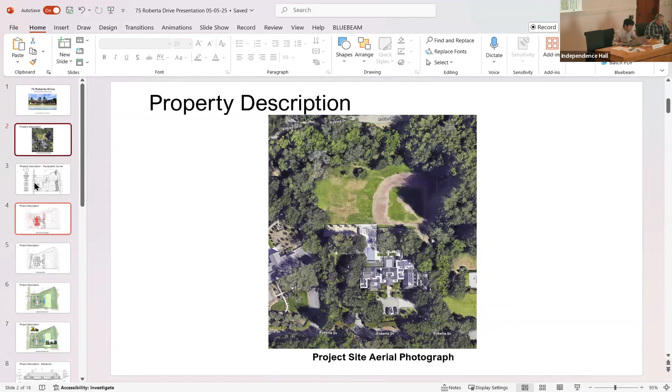To give background on the property: the size is approximately 3.049 acres and is in the rural residential RR zoning district. The overall site is relatively flat with the exception of the eastern edge, which slopes upwards towards Roberta Drive.

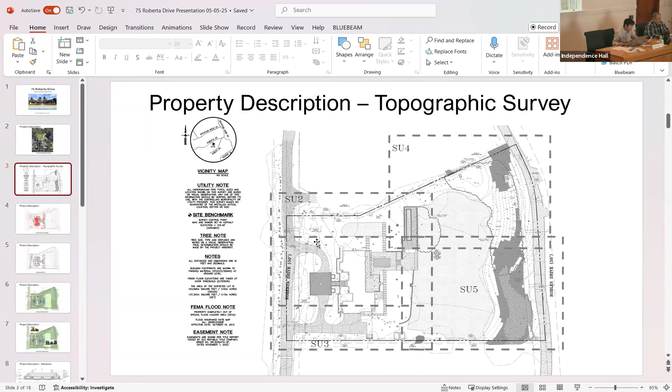The project site is visible from Roberta Drive at the front property line, as well as from Roberta Drive at the rear property line, and from adjacent properties. The site is heavily screened on all sides by existing trees and shrubs.

The applicant has also provided a demolition site plan. This is the overall site plan, which shows the details and extent of the conceptual design project.

The proposed main residence would be relatively in the same location as what is existing. The two ADUs, notated as West ADU and East ADU, are called out on the plans. The plans also show a pool in between the two ADUs as well as a generator enclosure on the rear side.

The applicant has also provided a proposed landscape plan, which shows the extent of the landscaping on the site, as well as the proposed screening.

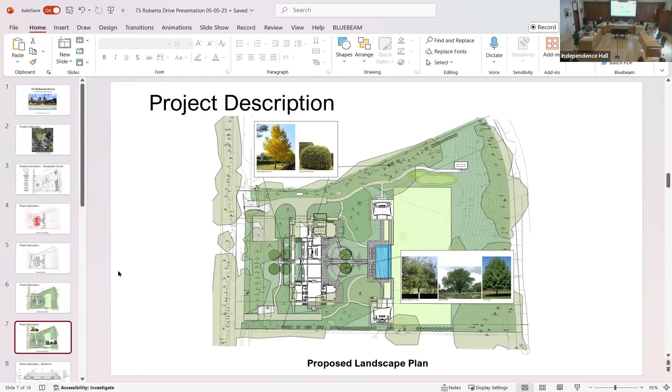So these next few slides are the elevations. For the residence, the project plans, as you can see in the elevations, call out proposed basements.

The basement grading quantities will exceed the maximum basement grading permitted for the site per Woodside Municipal Code section 151.22C, table 1. The project site shall not exceed 2,666.67 cubic yards for basement grading.

The proposed basement grading, as shown on the project plans sheet C1.0, is 4,105 cubic yards, and also does not specify the quantities of the basement light/egress wells.

The project includes large mechanical rooms and storage rooms in all proposed basements, which could be minimized to reduce the amount of basement grading. No exceptions can be permitted for the maximum permitted basement grading. Therefore, the applicant will need to reduce the size and/or depth of all proposed spaces and update the grading calculations to meet the Woodside Municipal Code requirements.

This is the elevations with the basements, starting with the front. This is the elevation for the rear. The elevations for the sides are from looking at the east, and elevations looking at the west.

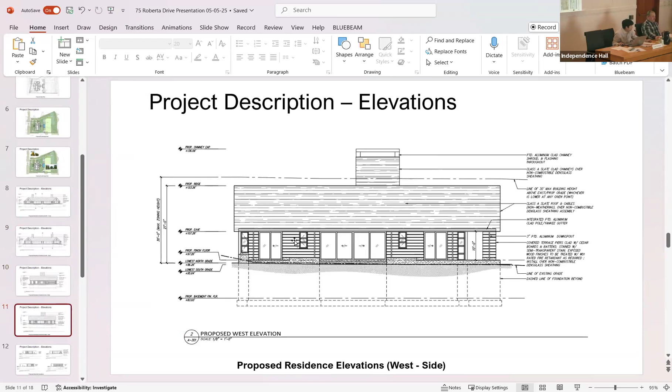The applicant has also provided elevation plans for the West ADU, as well as for the East ADU.

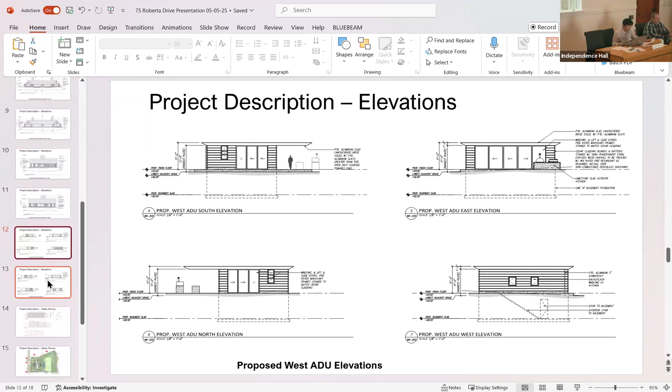There are two proposed entry gates at both driveways. The gate at the driveway on the northwestern side would be 16 feet wide and consists of compact vertical and horizontal steel framing. The entry gate for the other driveway at the southwestern side would also be 16 feet wide and is proposed with horizontal steel framing.

The wood fence is called out as a replacement for the existing fencing along the front of the property. There are also stone retaining walls proposed near the front side of the main residence and additional walls at the pool and lawn.

The applicant shall provide the fence calculations in relation to breaks and openness and ensure that the gate allows for more than 40% in open design.

The entry gates would likely need to be relocated at formal design review, as the setbacks would not comply with the adjusted setbacks taken from the interior of the easements on the project site.

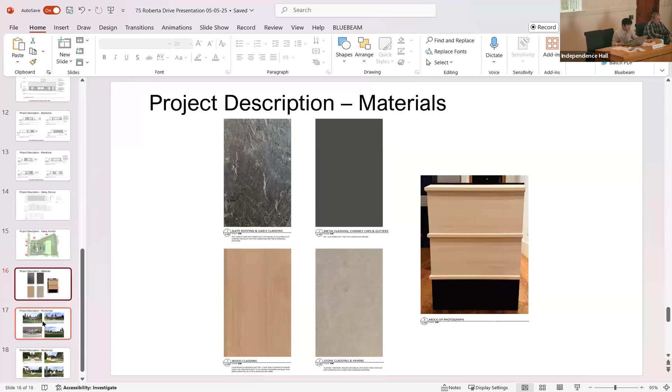This is the digital material samples for the project, including slate roofing, as well as wood cladding, stone cladding and pavers, as well as metal chimney caps and gutters. Lastly, the applicant has provided some renderings of the project site, including the main residence from various perspectives, as well as renderings of the ADUs for the west and for the east.

And so that concludes my presentation. Story poles were installed at the site at least 10 days before the hearing tonight. Staff is happy to answer any questions, and the applicants are also here in attendance. Thank you.

At this point, I'd like to ask the board if they have any questions.

One, I noticed that solar isn't part of this plan. If I'm wrong, is solar required at this point in California for construction? So at the conceptual design review, solar is not required to be shown, and it's not necessarily even shown at formal design review. There is a building code requirement for solar, and given laws related to solar in the state, they can't be reviewed or denied for aesthetic reasons. So it's only health and safety, and therefore we don't necessarily see them very often.

Just wanted to ask for the applicants - they will need, if they haven't already, they will definitely need to by the building permit stage to work out whatever's required by building code.

Other question: with regards to height, is it near a transit corridor? Is it within half a mile of a transit corridor? That's not something we've looked at. I don't think there's any buses on Mountain Home Road. No, it's within half a mile, so 84 also. If that's within half a mile, I'm not sure. We haven't looked at it.

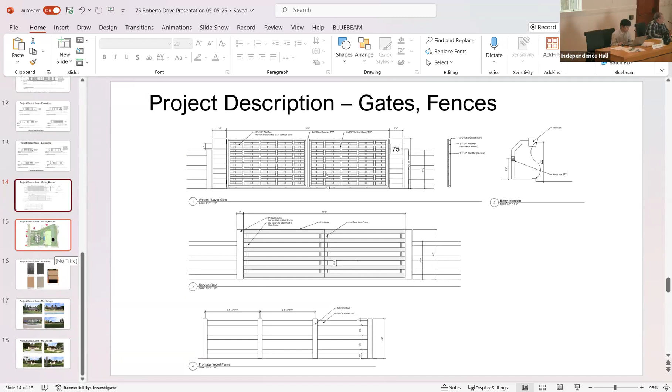We'd like a little bit of clarification on the louvered roof areas on the two ADUs. That's something we'll need more clarification on at the formal design review stage. They need to be at least 50% open to not be considered a solid roof, and they can't be closable - because if they're closed, they wouldn't be 50% open. So we'll get some more details on that with the formal design review. Sensored or not, we don't know that at this point. Rain makes them close? Yeah, they shouldn't be able to close at all, they should be in a fixed position. That's only a problem on the west, and only if there's an issue with setbacks or floor area. When you get beyond 8 feet from a building wall, a solid roof starts to count towards floor area, so that'd be one thing to look at.

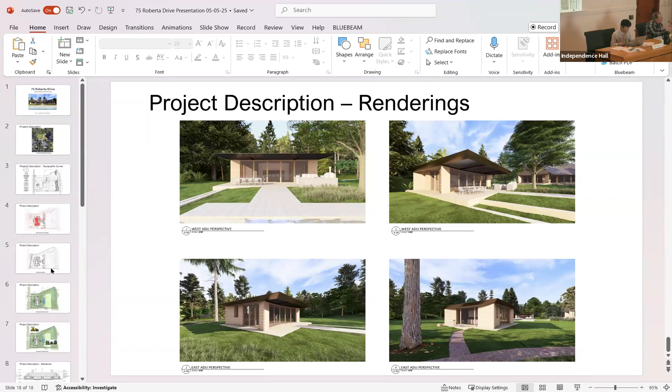It's interesting because the ADU with the larger overhang is within the basic setback, which is allowed for ADUs, but it has this large overhang extension that goes further into the property, not into the setback. So that's something we're going to look at a little closer based on the details of the roof design.

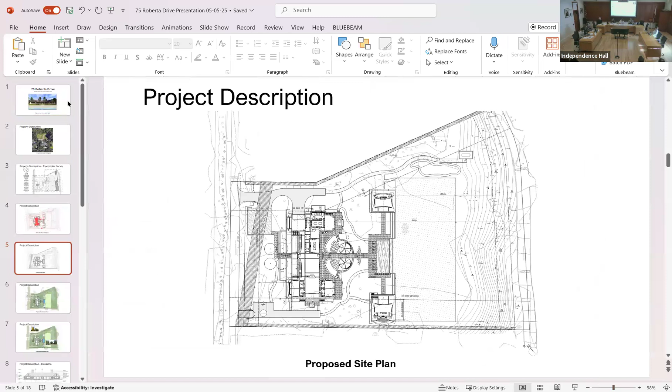One other question: it looks like they're going to be taking down 3 pretty serious oak trees. Is that addressed at formal review? I think it'd be best for the applicant to actually speak to that, because the plans were a little difficult to identify where all those trees were being removed. They're mostly in the building footprint. There are some maple trees being relocated, but the applicant could probably best address that.

East and west ADUs, that's a problem. It's something that we could look at. Yep.

Any other questions that the board might have for staff? Just that it seems that will verify the accurate point of measurement for the square footage in the end. You'll get around to that, definitely. We've looked at the floor area calculations, done a pretty good job. There might be some areas that need to be tweaked a little, which could lead to maybe some minor changes, but nothing significant.

At this point, we would like to invite the applicant to make a presentation.

Good afternoon, everyone. I'm Ross Padlock, the architect from Kligerman Architecture and Design. I have here with us Christopher Olstein, the senior associate in charge of our project, as well as Eric Blasen and Nate Dunham, our landscape architects, and Jim Toby from Lea & Braze, our civil engineers.

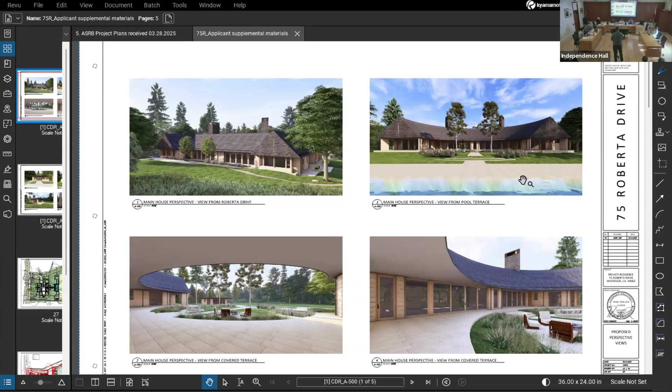I noticed you had a picture of your materials. Do you have a material sample? Yes, we have the physical samples here.

This will be wood siding, Alaskan yellow cedar, with a semi-transparent stain, also treated as required. We'll treat it with a fire retardant material, install non-combustible sheathing behind it, and put it on a channel so it's held off the structure of the house, more like a rain screen. This is an auberge limestone, which will be the paving and also the first course of siding up the foundation until it meets the wood siding.

This is our slate roof, which will be on the whole house, and we'll be tone-matching the gutters and chimney caps in this color. We don't have a sample of the metal here, but it'll be tone on tone to the slate. Those are mahogany, yes. The maintenance... Thank you.

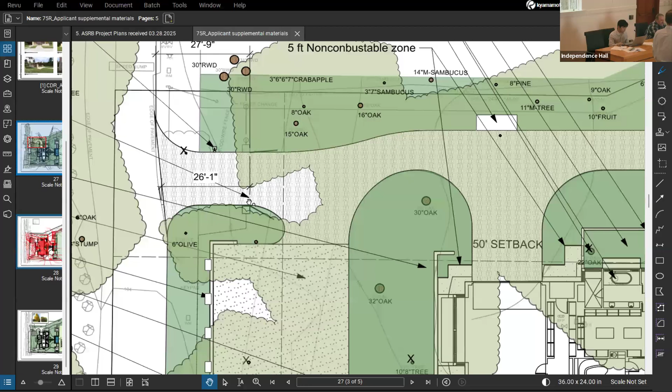I was confused. I think the gate locations may be fine. The one thing we need to be clear on is the setbacks for the property are measured from the easement line, not the property line. So you need to make sure the gates are outside of the easement, which I believe they are. And as long as they're outside the easement and meet that 25 feet to the driving surface of the road, they're okay.

Yeah, the main concern was really looking at the rear of the property and the generator enclosure. That setback depicted on the plans looks like it's being taken from the property line and not the easement line, and so we want to make sure it actually complies with the setback. Okay, yeah, no, we can definitely take care of that.

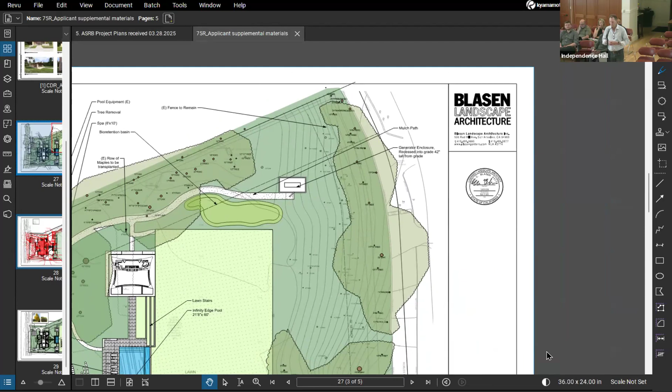And we can definitely cut sections and show you that, and make sure that it's not in the 35% slope zone as well. And then our drawings that we'll do next will be a lot more detailed. They'll meet WELO, there'll be a lot of natives, a lot of low water plants.

We're proposing 2 big trees in the back in that oval section. One of the species we're looking at is a coast live oak, another one's a valley oak, and another one is a linden tree. So we're looking at 3 different options there. We're looking at 4 ginkgos in the front.

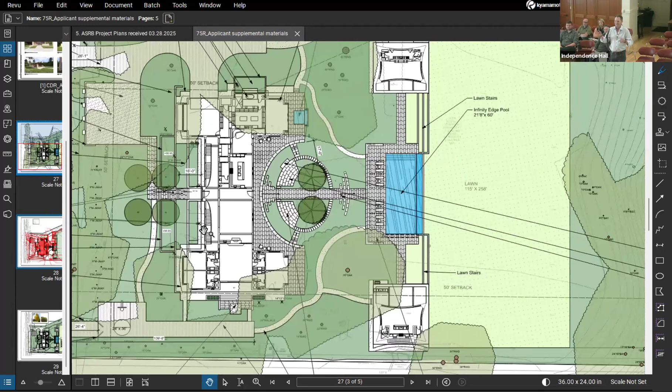And then we'll take the sport court out, but we'll make a turnaround so that somebody could back out. And then the other gate, just a clarification on the utility gate—it's a steel frame but with wood horizontals, it's cedar, so more country. And we reduced the size of the lawn; it's a baseball field now, so that's smaller than it was.

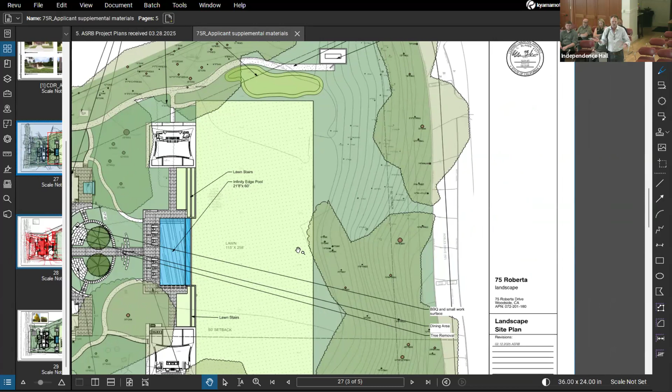And we're not really touching anything on the hillside, and we're preserving a lot of the trees. One of the big trees that was shown to be taken out was diseased, and we got a permit and took it out already. So if you've gone to the site, that tree's already gone. Sad, because it was a big tree, but it was completely defoliated.

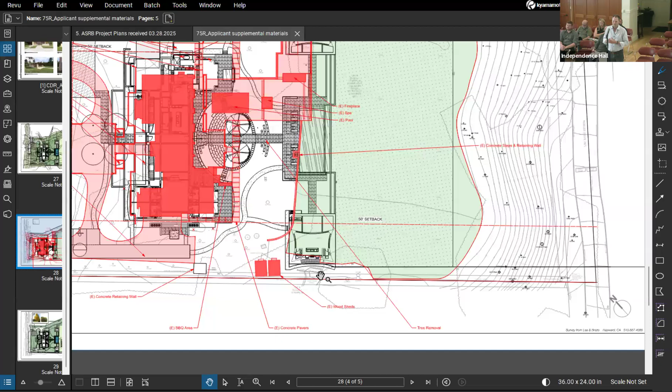The other trees that we're proposing to take out are just so close to the house, we didn't really have a lot of room to wiggle there, so that's why we're taking those out. But the site has a lot of trees on it, and we're planting some more. You can see the canopy zones on this, so we have a lot of tree coverage here, and then we're relocating some trees too.

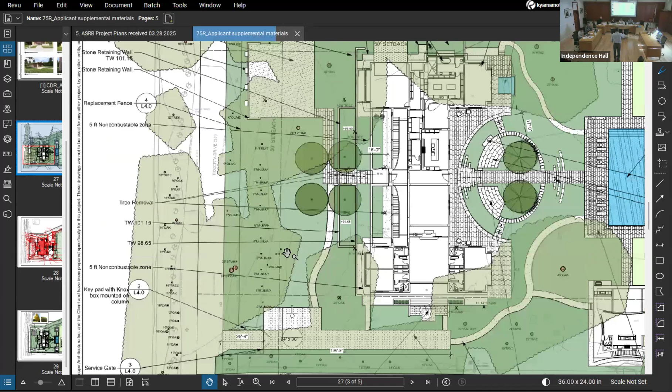They were taken out at the front, kind of opposing corners. That's the one that died. One was in the back by where the pool area was, the big one that died. And then the other ones weren't too big.

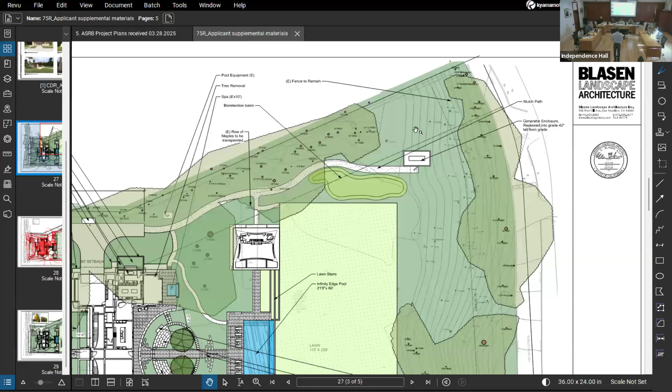Because there is an issue with the generator, did you consider a power wall in the garage so you don't have to deal with the issues that might come up with the generator? We didn't really talk about that because I think they want to have a lot of power, they want to power their whole house, so I don't know if power walls would do that. Probably not the whole house. But we can move it and pull it over.

You can see that darker, or that lighter green area, is a bioretention basin. So all the water comes across. There's actually a pipe that goes underneath there now that we'll be redoing to make the drainage better, so we're working with Jim Toby on that as well.

Have you started working on the perimeter concealment for the generator yet? We will when we do our planting plan, we don't want to see it anywhere. The neighbors hearing it wouldn't be great either. Yeah, no, we were thinking of building a structure around it for sure.

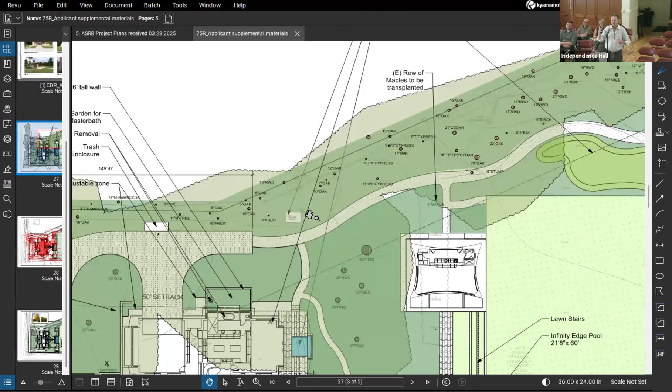Actually, I had a question. If you pull the plan over slightly, right where your hand is, there's an existing vault where their pool equipment is now. We thought, why not just use that for the spa at the house? But then I got a comment from staff that it's in the setback and you can't use it, but it seems a shame it's already there. If it's in a vault below grade, it can be in a setback, and that's something we just weren't clear on.

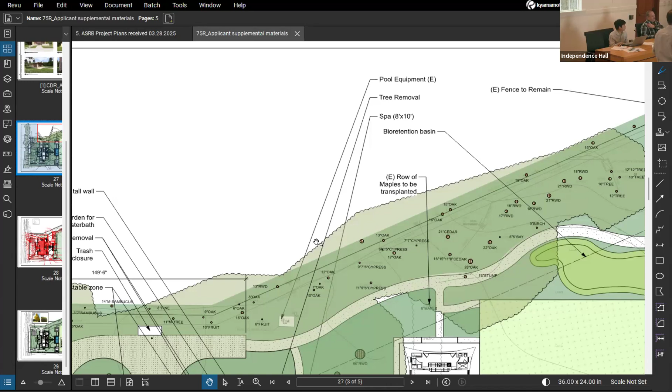If you're going to do new pool equipment with a new pool, it should meet the setback, but completely below-grade vaults can be in the setback. Oh okay, that's perfect, so we would do that for the spa. For the swimming pool, we'll put that in a different location, or under the house.

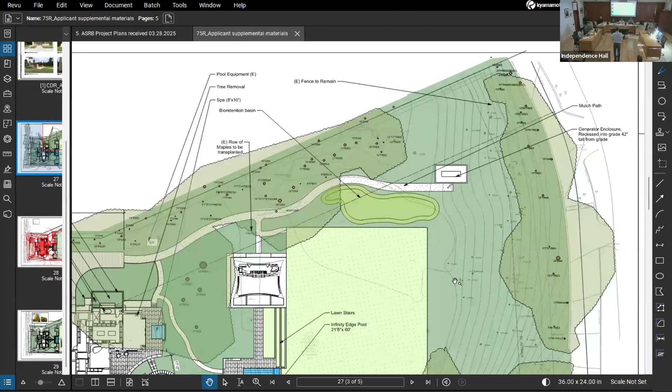I lost my power on Sunday. My daughter got married this weekend, we were having a brunch and the power wall worked. Now, I don't know how many days it would work, but it was good. It's something you might want to take a closer look at. I mean, for all you need are more panels, right? And it's quiet and it's clean in the garage. Yeah, it makes a lot of sense, it's not causing problems with the neighbors.

Okay, thanks. Any questions for me? Any questions from the public that might have some questions for the applicants?

I'd like to know how long the project is going to be going on. Well, we happen to have the contractor here, they can tell you. Van Acker Construction's the contractor, and I know the clients want it built as soon as possible. After this process, we do our building permit drawings and get going, I know they'd like to get it built as soon as possible, but I can't really speak on that. 30 months? 30 months.

Sure, here, one second. Thank you very much.

We live across the street in back of the property, and we have 9 acres that are not fenced, we have a split rail fence. So we see lots and lots of wild animals, wild birds, and when you planted all those plants along Roberta Drive, you cut off every avenue of any natural habitat, which concerned us very much. There is no air circulation, I don't know why the fire department ever approved it. It's very dangerous. I feel that should be cleared out so there is circulation and encouragement of native habitat in the area, which we have always had.

Would it be possible for you to show us on the landscape plan the outline of where the fence will be installed? They have an existing fence, and right now they're only showing a new fence in the front. So with the formal design review application, we're going to want to get more details on what's existing or if they're proposing to make any further changes there.

So there's not a fence in the back at this point? There is a fence currently. We did a site visit to look at the perimeter of the property, and there is an existing fence at the rear, and likely on the sides as well. There is also one in the front that they are replacing - they're showing a split rail fence, a lower fence in the front, without any wire placed on it, which can also help facilitate some wildlife passage.

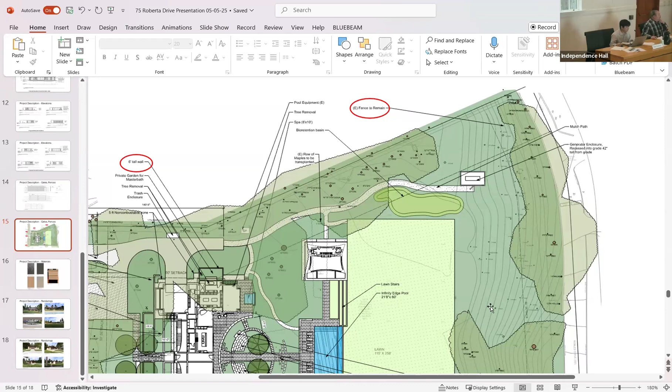That's what I was thinking. I had a previous project where this was an issue - we had them come back to us formally. You want to do that here? I think, just going through all the comments and figuring out where the board is, and then make a decision of what you'd like to bring back.

Yeah, in general, I think it's a good project. I have no issues with anything. I think a possible solution to the question on the roof overhangs and switching the ADUs - if it can be addressed through other means, I see no reason why other means aren't valid. Even though solar is not required here, I don't know where they're going to put solar if they're doing a slate roof, and I worry that means more trees coming out later. I would encourage them to use some of that space in the main residence for a JADU - it might be useful later down the line, and they have the space for it.

But yeah, I would like to see this come back to us formally, so we can look at the fencing.

I reviewed your project and did visit the site. I didn't have any particular questions or comments beyond what the staff had already identified, in terms of several areas of compliance and some general comments about fencing, gating, and so forth. As long as you do the routine staff follow-up on all that, I think we'll be in good shape and can keep moving forward.